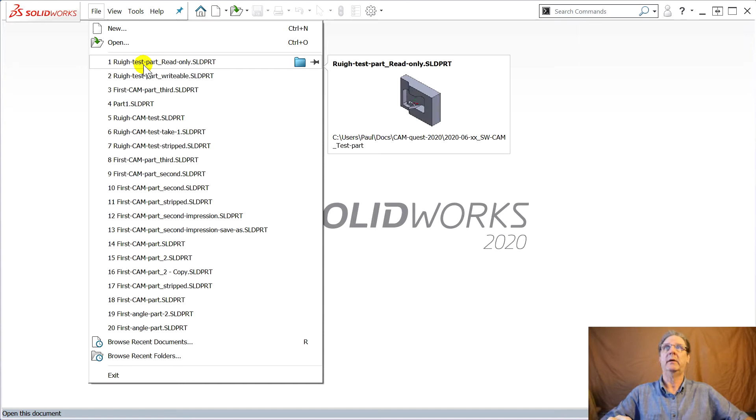So let's see if we can come up here and start. I went Ruigh test part, read only. Open it read only, just to make sure. I went and got it off of his email when he sent it to me, because, okay, it's converted - he must be using an earlier version than 2020.

So here's the part, and here's - I think it's 3 inches by 4 inches. What is it? Solid body. Isn't it amazing? There we go. It's 3 by 4 and 1 inch tall. So much more reasonable than that first impression, second, third impression part that I was using, which is a ball nut. Shouldn't probably make it.

Dave gave me some advice how to make that. And so we're going to have a fourth impression on that one and show you how Dave would make it, because he's a lot smarter than me.

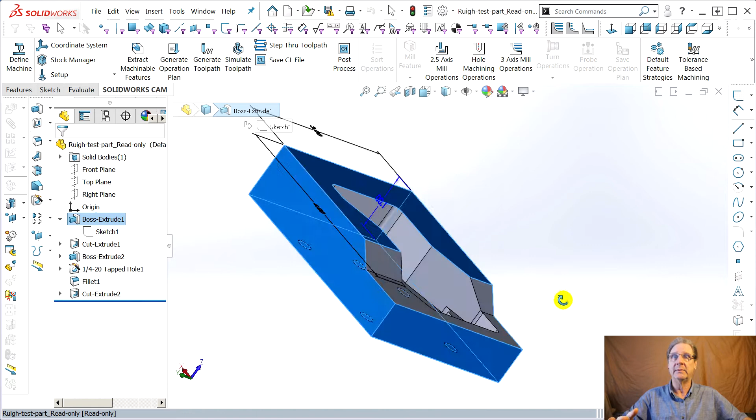So here's why Dave knew - now I understand why Dave figured this would screw things up. It's got a breakout here from this 1/4-20 tapped hole, and it's got another breakout here in these two bosses. But he did its thing - he let the SolidWorks do its thing.

What do you do? Escape. And then here's where - it's interesting because his has all this, mine doesn't.

All right, so when you go to SolidWorks, tools, add-ins, turn on the CAM, you get these three tabs. This is the feature tree, shows all the features that this thing sees, that it automatically recognizes. I turned on this command manager here.

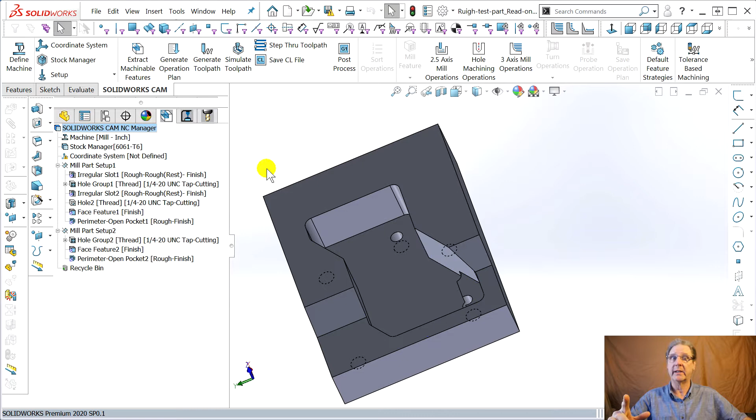It's a right click, so you can say extract machinable features, and I think that's what he did. I'll verify all this for the next one, because there's going to be a couple of videos about this part, trust me. Then generate operation plan - that takes the features, like you've decided, well, that's a pocket, and that's a tapped hole. All of these things here, face.

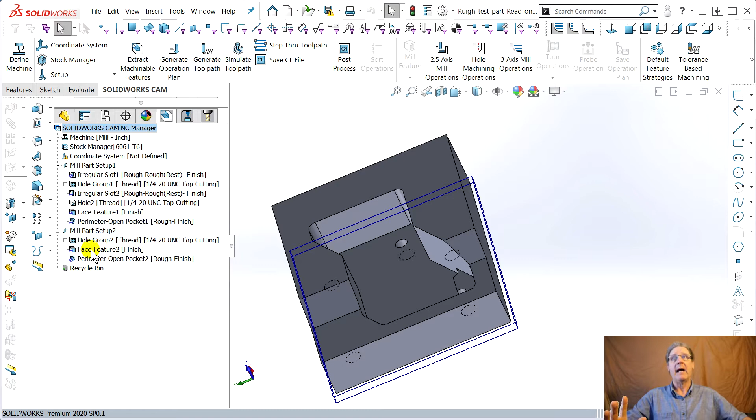See, you can see this thing's already screwing up. It's putting the face feature after the holes, so a center drill will crash - you'll rapid a center drill down into the stock because you haven't faced it off first. I don't know if Dave moved those around, or I didn't move it around.

So these features come next. Then there's a tool crib - these black tools are the ones that it uses, blue means it's not in use. And SolidWorks decided all that.

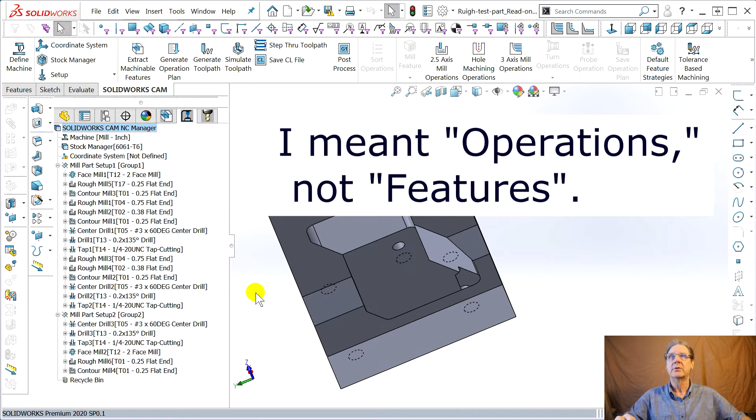So we're back in the operations here, looking at all the operations. You can see the tool paths, so let's get it so you can see it. Say simulate. Now, here's what's dangerous - if you say ignore collision and let it do its thing, it's pretty impressive.

Got to cut these corners off. It does the perimeter, does this inside part - it all looks pretty cool. It's doing rest machining, very sophisticated, where it uses a 3/4 inch end mill, but then it can't get in the corners.

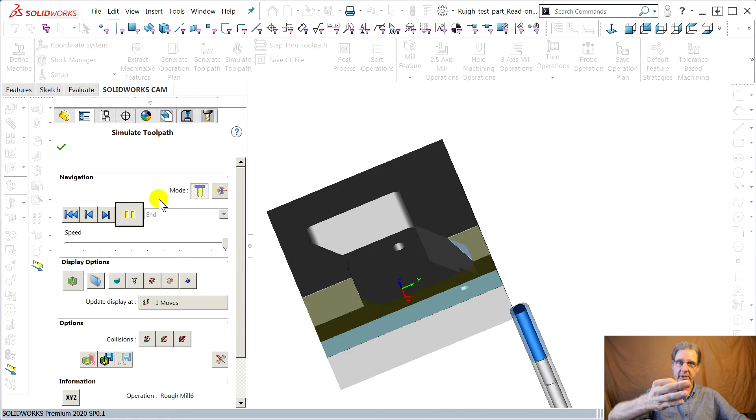Then it uses a 3/8 to get the little bits it couldn't get, but doesn't go over the whole pocket. It just does the ones that were left, rest machining. Then it does a finish pass.

Oh, so sophisticated. And you think, oh well, this is cool, look, it did it. This is what impressed Dave. But there are 2 problems.

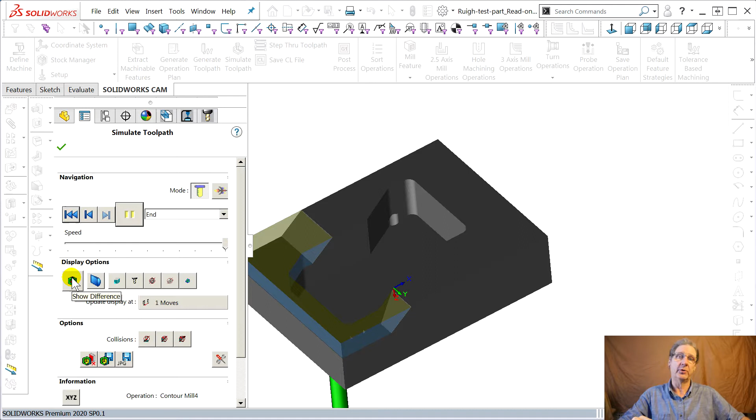First, you got to know, oh, to show the difference, this is how you see what's going on. Well now, okay, I think he and I both didn't expect it to do this angle. That's called, you can do it even though this is a 2.5 package, you can do it with, was it multiplane? I forget.

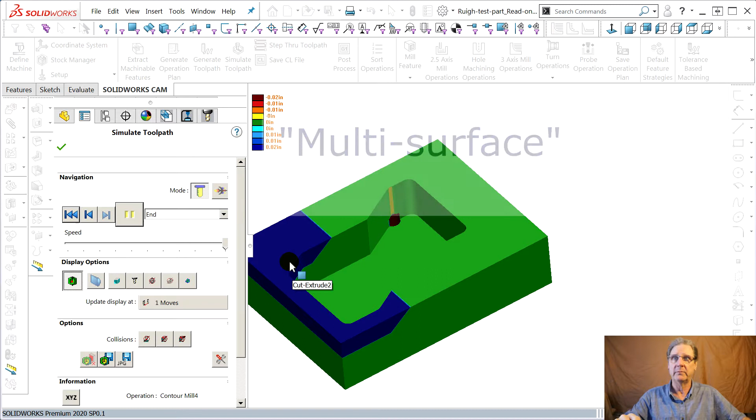So you can go and just raster across this and carve it down with a ball nose end mill. And that's another video, we'll show you that. So don't be worried that all this blue is left. This is the deal: see, when it's blue, it's uncut. When it's red, it's gouged. So this yellow one has got a little gouge here.

And if you come in real close, oh by the way, I found out you can switch the way the scroll wheel zooms to make it like TurboCAD. And that's under options, view, I think. And it lets you change the way the mouse wheel works.

Now notice, it left this little blue thing that's extra, and there's a little extra here, there's a little extra there. Then, oh, it's so heaven having the scroll wheel work the same in both. I use TurboCAD a bit, you know, for construction, stuff like that. It's a Boolean thing, it's not the best.

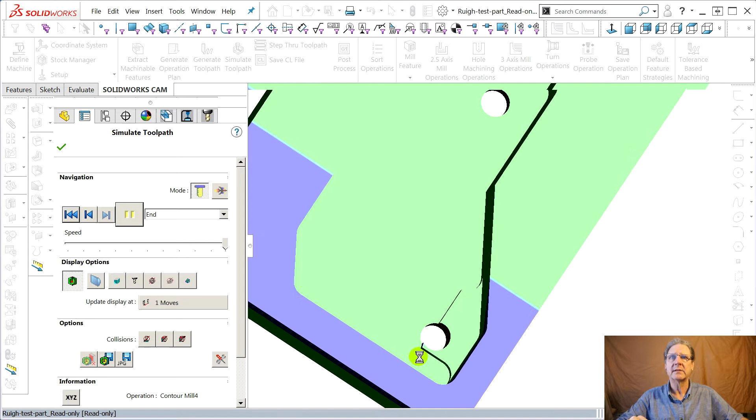And then it left a little bit here. See that little blue there? What's going on? What's that added to?

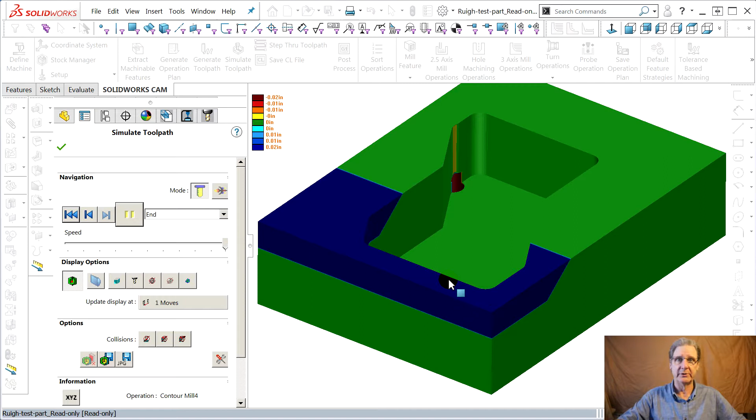So that's a concern. And you say, oh well, it's not much. It is, because the part's not to print. The machinists I know, I got a lot of buddies who are machinists, they go nuts. It's not to print. It's gouged there.

So, but the real problem, go here, you always want to pause on tool collision. Because this is what screwed me up once. It was out of order once again with the facing.

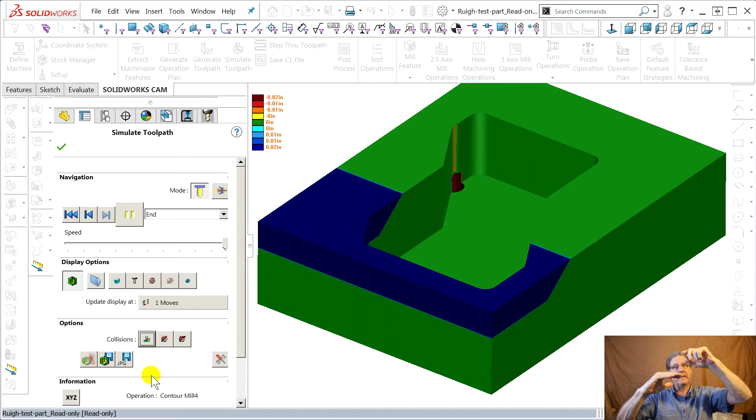So before it faced, it went to go do the center drills on some holes, except it rapids down right to the top of the part, but it's still stock now because you haven't faced it off. Well, it all ends up looking great if you ignore collisions.

But now that you turn collisions on, let's go to the beginning. It's doing its thing, it's doing its thing. Boom, first collision. And you'll see that's because this pocket is misdefined in the feature.

When it automatically recognized it, it only recognized it starting up here. It doesn't seem to realize the pocket's supposed to be cut from top to bottom. Okay, so here I'll just hit enter. Okay, all these tool crashes.

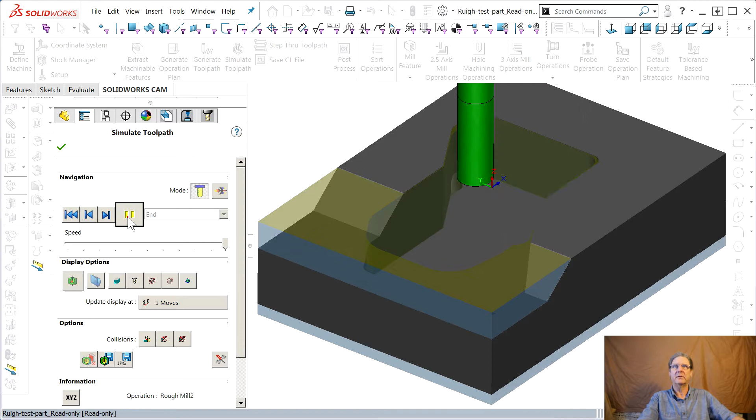Now it has some others with a drill, the rough mill, center drill. I think that's a little less problematic. I'm not sure, we'll have to go look.

Oh yeah, because once again, it's order of operation. They're doing those two holes. Why they're doing them from above, I don't know. They could do all the holes from underneath. This is when computers do your thinking instead of your work. So that's what was going on there.

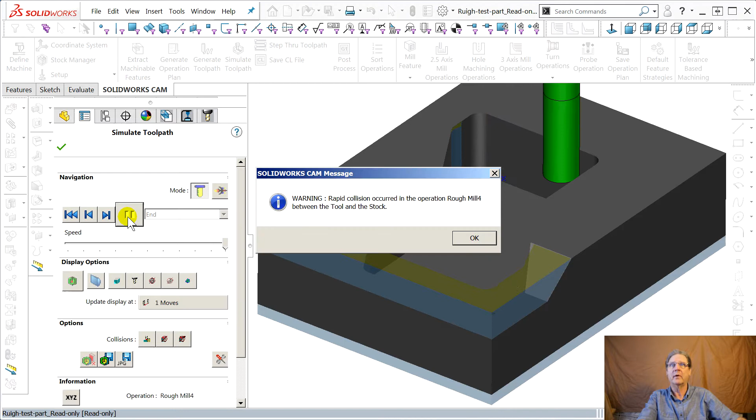All right, all right. And see, same thing, because the facing is in the wrong order. And like I say, I don't know if Dave moved them around or what. I can't imagine he did, but okay. And see, there was the face, the big face thing that you saw fly by.

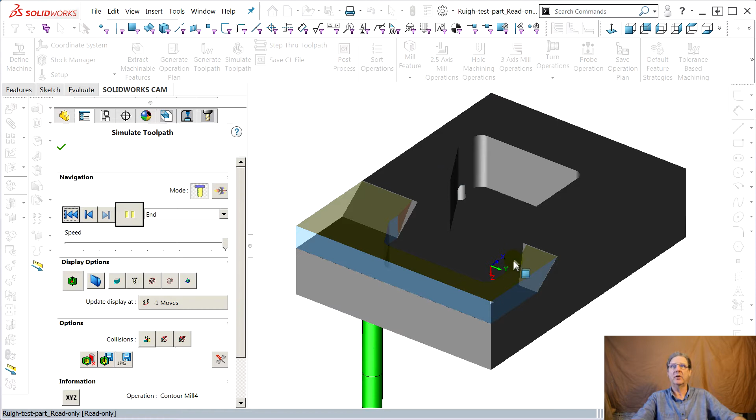So that's the first problem. Okay, so now we know we got this gouge here, we got a little extra material, something isn't right here.

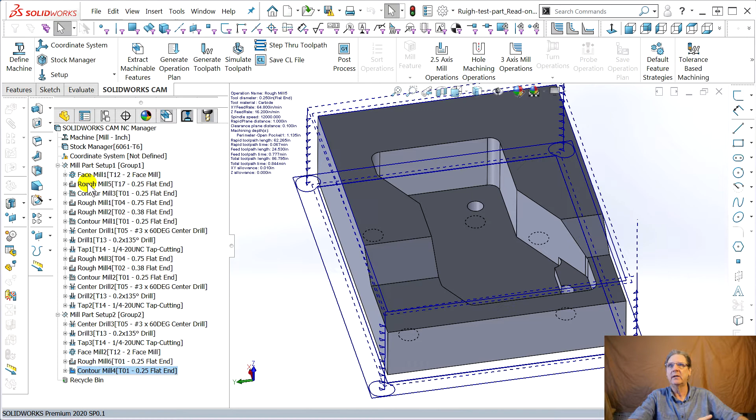So in the feature, in the middle one, okay I'm sorry, I said feature, but it's so confusing with these two tabs, the operations tab, not the tool, the middle tab. Okay, first mill part setup one. It's facing, that's good. It rough mills, contour mills.

Let's do this, let's just delete everything. Contour mill the outside, delete, because we know it's this pocket that's the real trouble. Contour.

We'll even take these drills out. Delete, yes. Drill, delete, yes. Tap, delete, yes.

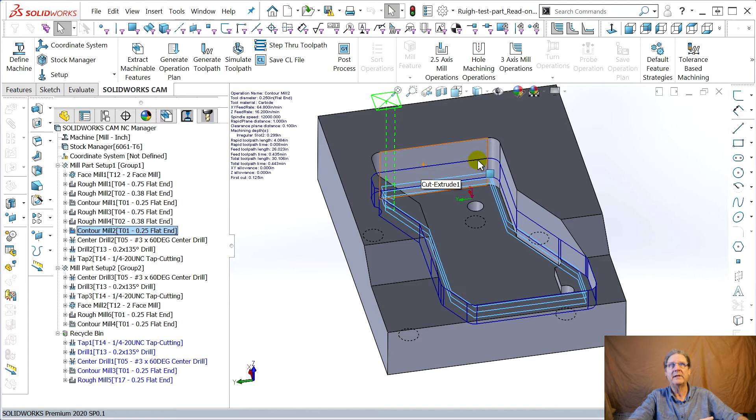My videos have been running long. See, here's the problem. It's defined this only up to here, but it's supposed to go all the way to the top of the part. So that's some of the crash, and you can see it's rapiding down as soon as it hits here.

Center drill, I'm going to delete this. I'm going to simplify this part. Drill, delete. Tap, delete, yes. And then the whole bottom thing, let's delete that, because this video is just going to be the pockets. Let's take that out.

So now rough. Okay, so here, this is the rest machining. Very sophisticated, this is wonderful, right? It takes a 3/4 inch end mill. And see, here's one fundamental.

It's doing the bottom pocket first, then the top pocket second. So then it does a 3/8 to get what was left over that the 3/4 couldn't get into. Then it does 0.25, a 1/4 inch end mill to finish. That's contour, right? Doesn't worry about it, and it doesn't spend a lot of time.

So obviously, rough, hit control, rough, contour. These got to be right under the face. Now we're going to do them in the right order. But it still won't simulate right. It's going to cause problems, you can tell, right?

This only goes up to here. You can see rapid moves going down here.

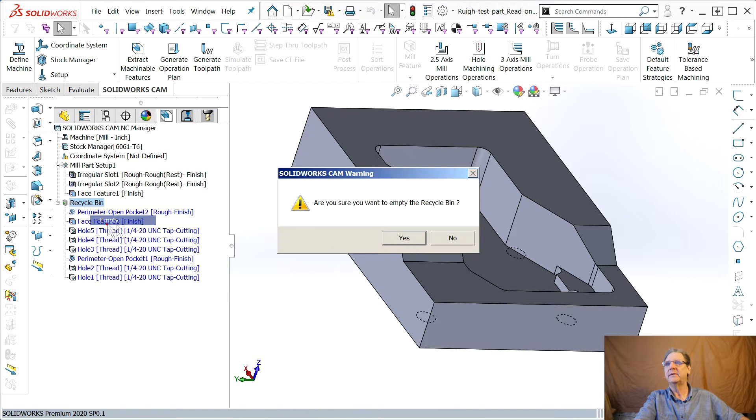Sometimes, okay, delete, yes, let's see how smart this thing is. Delete, maybe I went about it the wrong way. Perimeter, delete, we'll fix that, another one. Mill part setup 2, yes. Recycle bin, empty, yes, passive aggressive.

Generate operation plan, regenerate from the start. Okay, see, and you got to watch - even though you're here, when you say regenerate operation plan, it hops you over to the middle tab. They're helping you, right, to confuse where you're at.

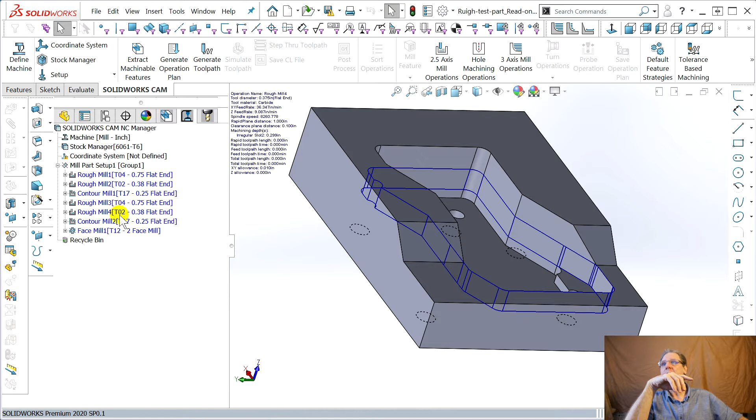See, it still did the face mill at the end. You got to wonder. So let's get back to where we were.

Face mill on top, rough. How do we call it? Rough, rest - see, they call it contour and finish. Depends what tab you're in, whether it's a finish or a contour. And there's that. So we want to take these 3, control key, to go right under the face.

Bam. Now this is telling us face, so that when you run stuff down, there's not material that crashes the tool. Do this,

Rough. Now, this is going to be a fiasco. We're already 12 minutes into this. Watch this fiasco. We know that this is wrong, right? Because the pocket goes all the way to the top.

Why did it decide to only - because of this plane? Like Dave said, he's a smart man, he knows what confuses CAM programs. So this is a feature problem, right? We haven't defined the feature.

This is just, we'll use this end mill, the operations tab. Well, what end mills, rough, rest, finish, just rough. So we got to go here. And let's fix this here. There's the other thing I hate, that these are different.

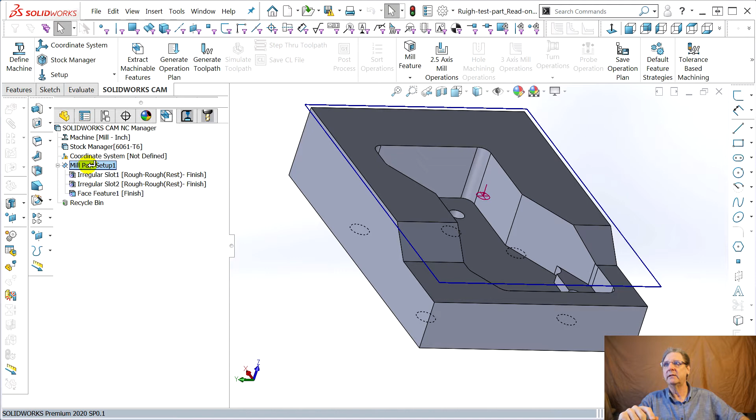Changing the order here doesn't force the order up there. Or maybe that's what did force the order, I don't know. Irregular and rough, okay.

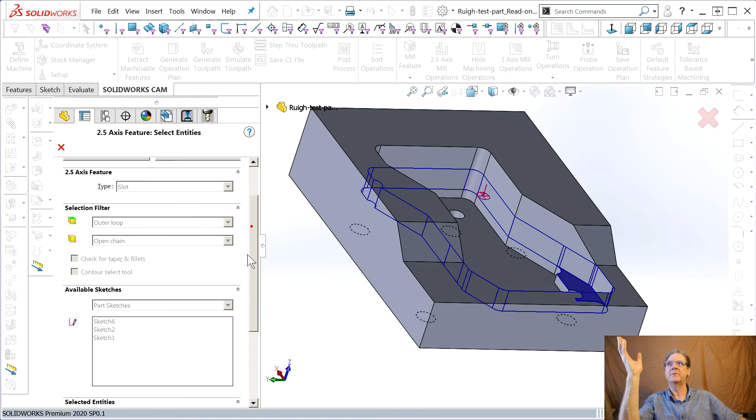So the face is fine. This is the one, double click on it. Watch the problems I'm going to have with this, because I tried and tried. Okay, so it's saying do this loop.

I want to start it higher. And some features, it says, it has 2 end conditions. They don't say start condition, end condition - 2 ends.

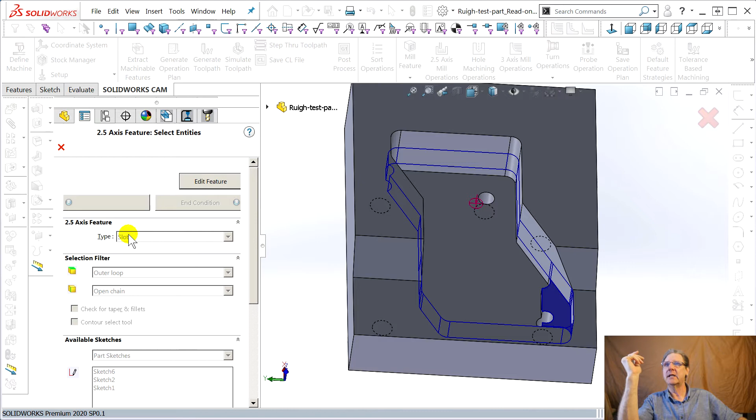Well, it's a slot, you're not allowed to change that. Edit feature. Okay, so now you're saying, okay, good, it's doing this - this is just what we want. We just want to start it. Instead of starting it here, we want it to go all the way and start at the top. Even though it's a start problem, it's called an end condition.

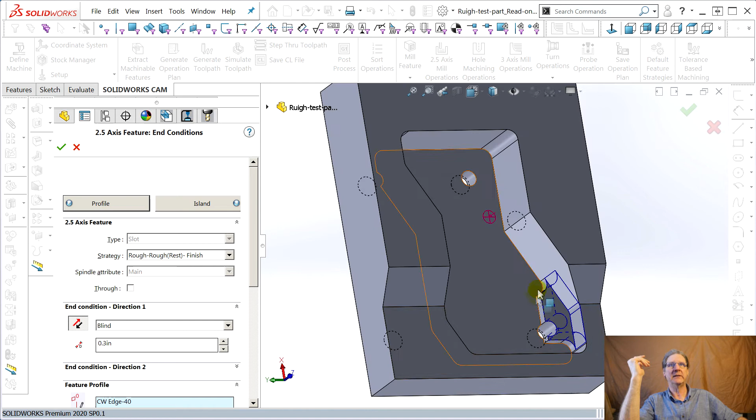All of a sudden, it changes the profile to this. I tried and tried, I couldn't get it to work. So what we have to do, after rehearsing and rehearsing, we have to erase this. Delete, yes. Irregular slot.

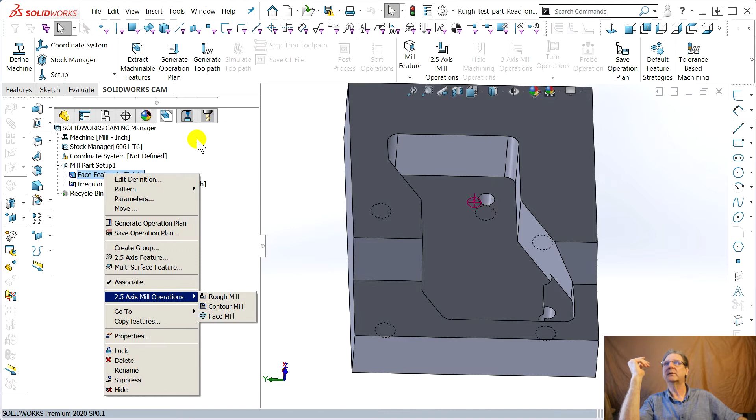Remove, yes. Then create 2.5 axis feature. We don't want a slot, because I've been through this. You should see it starts cutting out here, and it gets all confused, and it probably is operator error.

But boy, is this hard to work with. Okay, I thought, well, for the entities, do this and this. They'll add together. Now it gets all confused. Can't do that. You got to do something really tedious, because software is supposed to eliminate tedium when really it... and there was something else.

What? Outer loop, open chain, I think you select. How you're supposed to remember all this. See, I'm an intermittent user. I do this for prototyping.

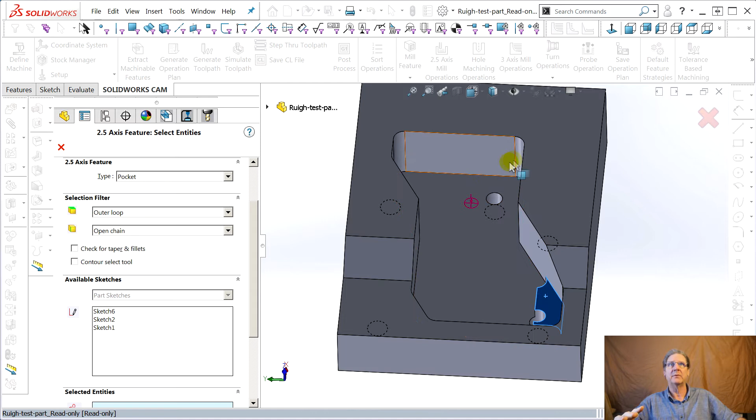So now, same thing. You can't do the faces. That causes problems, for me at least. You got to do it very tediously. Select these. Select these.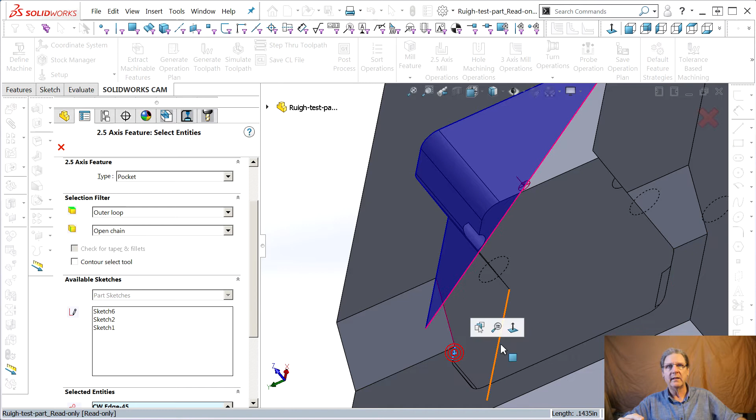Select. It's nice that they help you with this little vector. This is very impressive. You do this, it's smart enough to do that. If you miss one, this blue goes away, because it's like, hey, it's not a closed contour.

And I assume we're all familiar with the grief of trying to find and fix open, broken contours. Come on, Paul.

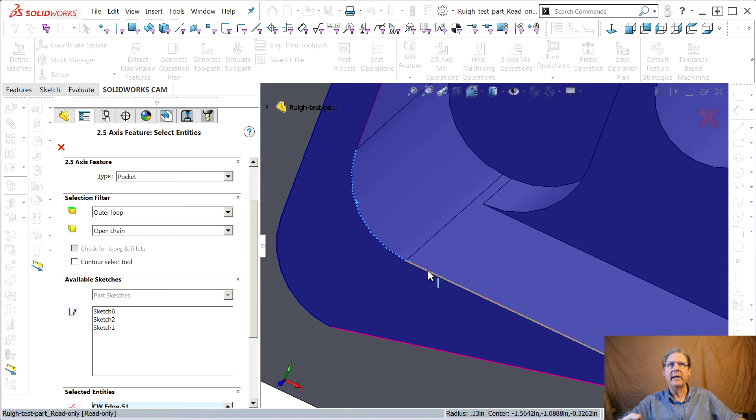All right, we want to do this one. We're doing so. Oh, wait, now here's a real trick. See, because this one... no, we're okay. Just do this. It's another one we're going to have fun with. This one, you got to make sure you get this one, and this one.

See, it's still working. I know this is pretty hard to follow. I'm sorry. Then this one, then this. I think it followed it.

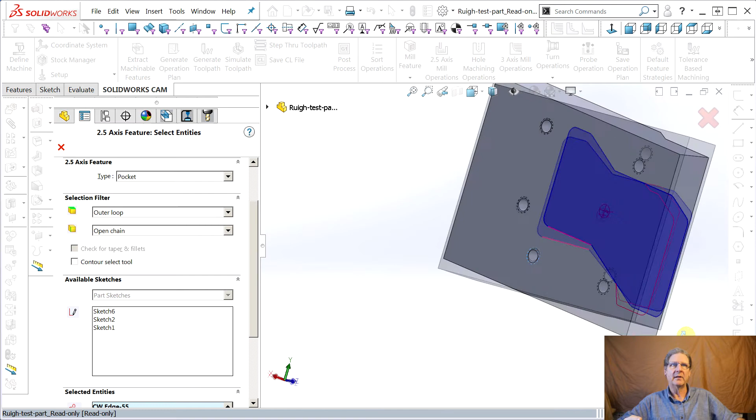And here. No, it's confused. Here and here. I think that's saying, I think I've defined the edges of the pocket. And you go up here because nothing's in a convenient spot.

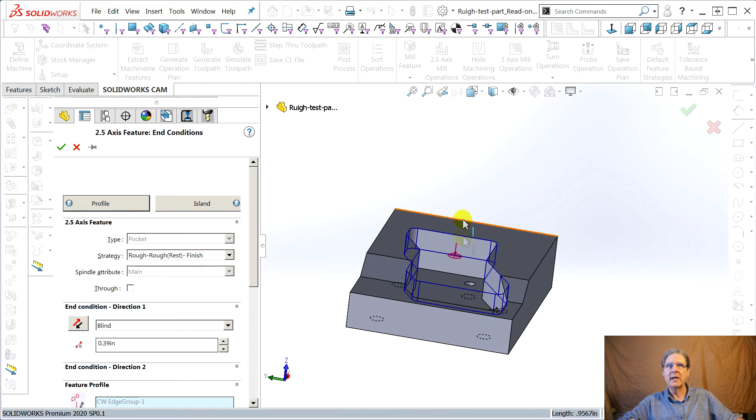Now it's coming down. It acts, it starts at this pocket, even though end condition 1, end condition—look at this. End condition, direction 1, end condition, direction 2. This is set to 0 because it's based on where that profile was.

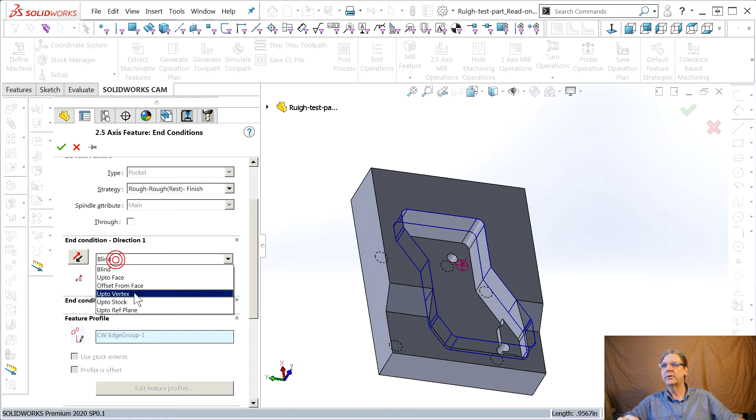Except it was smart enough, because maybe I picked this first instead of picking down here. It's smart enough to put the profile with 2 end conditions instead of a start and an end. So then you say up to face, and you want to go down to this face.

Bang. Perfect, huh? Sweet. Say check. Now you define that feature.

It's the first thing you're going to do. You face it, then you do this. So now let's say, I learned never go up here because it'll do goofy stuff.

Generate operation plan. It did. Now it jumped, it turned all blue. Panic you—that's because it jumped tabs. We were over here. And when you did generate operation, you did right click generate operation plan. It helps you by jumping over there.

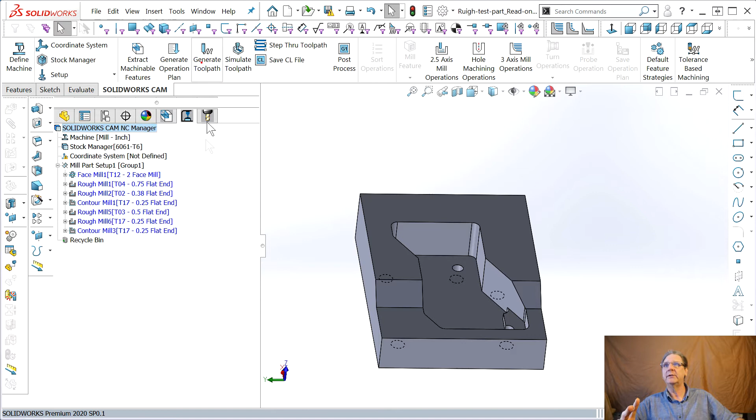These are all blue because it doesn't have toolpaths. You generate the toolpaths. Bang. Now, face mill. Oh, it always does them in the wrong order.

Don't know why. Always fighting. It's automatic. Automatically wrong. Okay, rough. This is the other problem I have, is hovering versus clicking. Okay, then it does rough with a 1/2 inch.

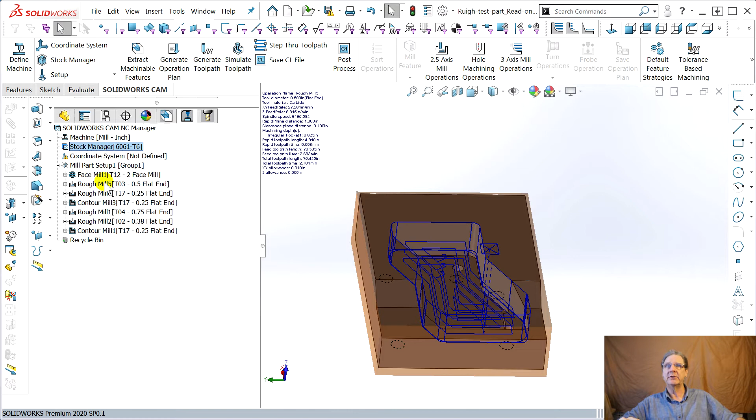Oh, the 3/4 inch end mill, it decided not to use. It's just doing a 1/2. It's doing a rough, then the rest with a 1/4, and then the contour with a 1/4. This one, it stayed with the 3/4, the 3/8, and the 0.25.

Why it decided that? That's all in the technology database and strategies and all this. Oh, and that kind of feature gets handled this kind of way. Sorry, we generated our toolpath, simulate toolpath.

How are we doing? 19 minutes. Did I leave this on? Yes. Okay.

Oops, we still got a crash situation here. What is it? Rough mill. Oh, I know what's doing this.

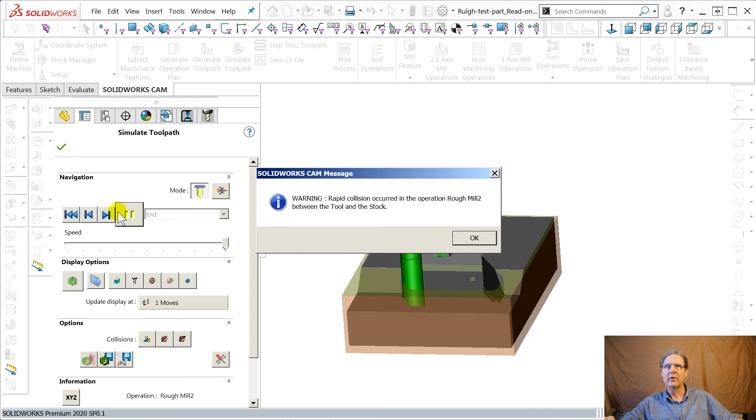Okay, this is entertaining. You'll enjoy this. And now we're done. See, because we took all that other stuff out. Now watch this. Oh, that's cute, isn't it? It gouged here, and it gouged here.

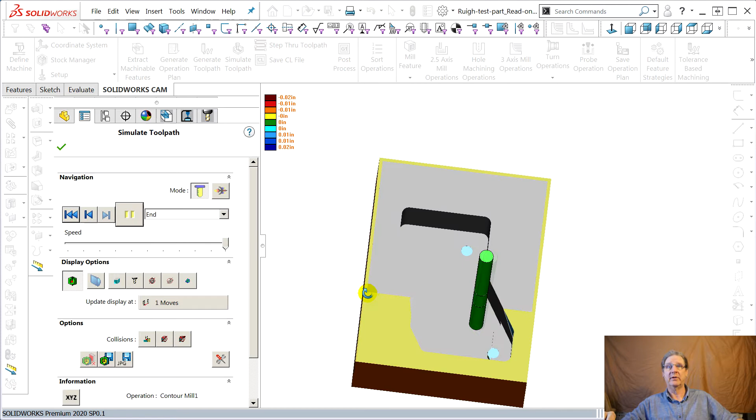I think maybe this is why they forced the goofy order of trying to do the lower pocket before it does the upper. It's got this big thing missing. There's a deterministic way why it did this, but it's pretty entertaining.

Okay, here, and you go to that. We're in operations. We're in rough.

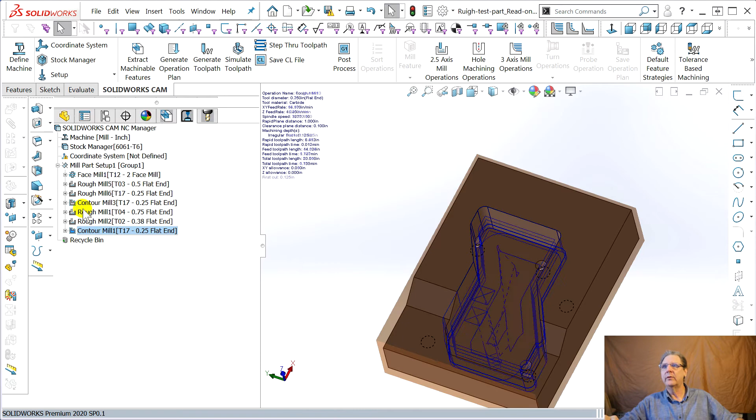See, these greens, I believe, are rapids. So it's rapiding down, will be okay. I think it's the second one.

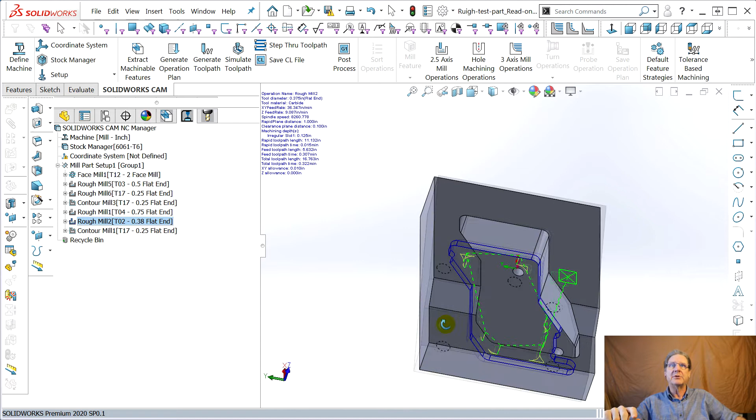See, this is the rest mill, where it's taking the little leftover pieces that the bigger mill couldn't get. So it's rest machining, but then it decides just to bomb right through. When it rapids over to do this little bit of leftover, then it rapids over here to do this little bit. That's where it's nicking and gouging off these things. Not very smart, but good enough that they show us.

Once again, middle tab, rough mill. I think you just double-click here. Then I have to open these off screen, because if I close it on the screen, it goes to a non-existent monitor and I got to go hunt it. You're going to have to put up with this.

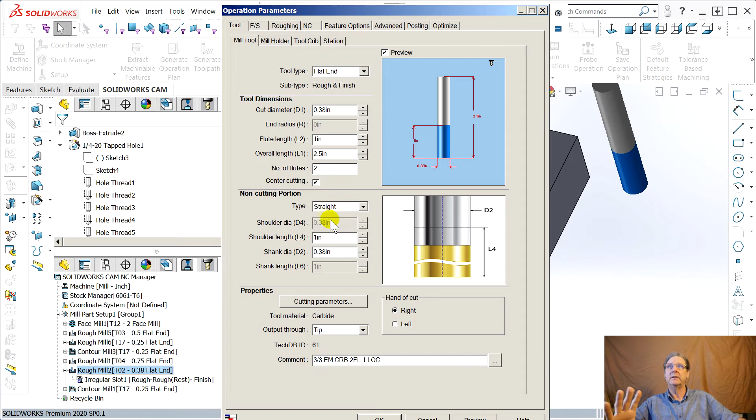Then tool, this is a tool it's using, fine. FS means feed and speed, didn't want to write it out. Roughing, this is, leave a 10 thousandths of an inch allowance. The finish mill is going to clean that up. Lots of choices, I assume needed. NC, numeric control, that's what it means.

It should be toolpath. What's going on is we don't go up high enough as we jump around to do those leftover corners. So clearance plane is top of feature. We want top of stock.

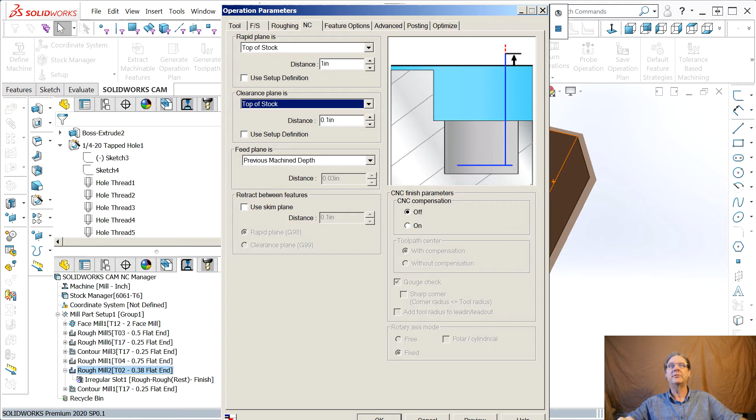Boy, did it take a long time to figure this out. Oh, don't say okay here, I'll be in deep doo-doo. Pull it off screen and say okay. Did you see him jump up? Now those gouges will go away.

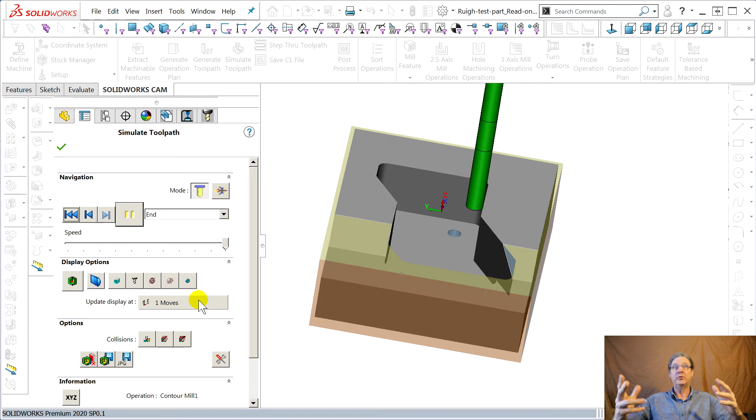Is it too tedious showing you over and over? That's why I took about all the perimeter and all that stuff out, so it's a little quicker, because this is what I've been doing all day, two days in effect. Notice there were no crashes.

But we still have stock here, and stock, this stock. And now that we took those holes out, you can understand what was going on, why we had that little swoop right here. When the hole was being machined from underneath, or actually they come from above, I guess, because there's a center drill that would hit here, a lot of it gets cut off by the drill. And so all that was left over was this little corner here.

But something was wrong, right? It's really important to find that out, okay? Get out of the simulation.

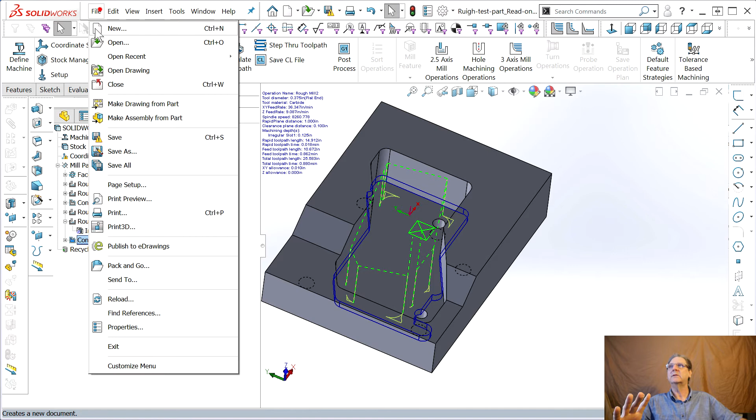Let's save it because we're in the save, read only. Writable. Is that writable? Saving the following files to the current version. He must have an older version. But I just wanted, because I got to convince him, like, Dave, this is the way it acts on my machine with my version.

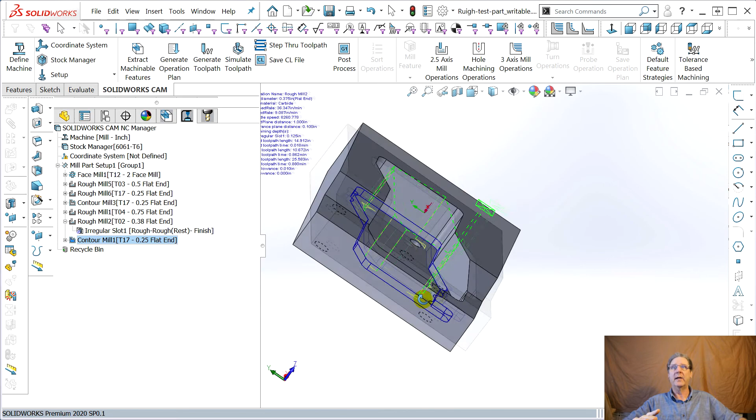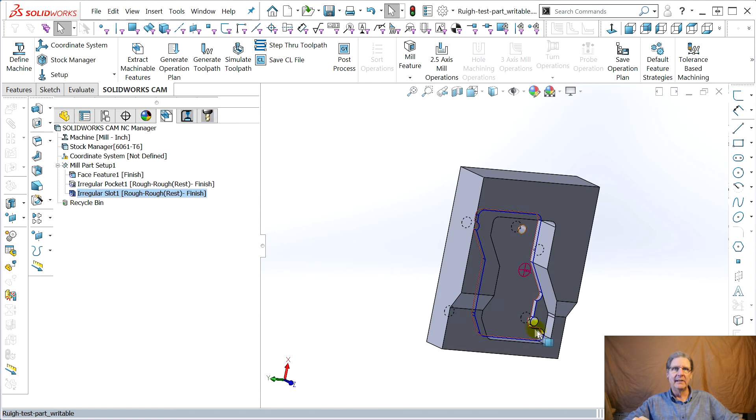Now we got to fix, once again, you go back to the features, irregular slot. This is our problem, right in this area, and you can see these dashed lines. Is it so confused? It kind of knows that it's confused. Same thing here, dashed lines.

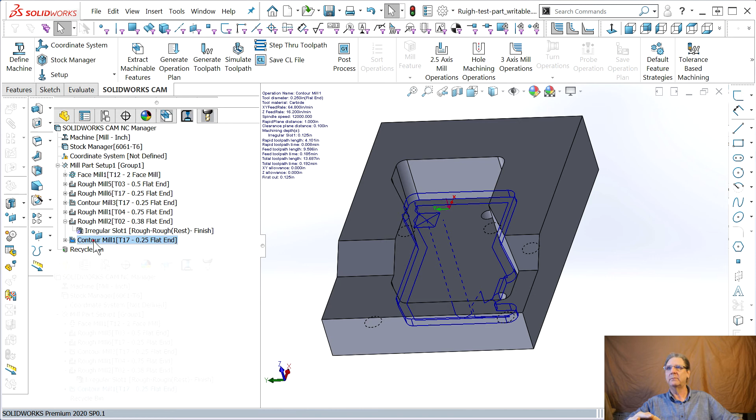There is a place on the, let me go back, pick the rough, I guess. Or maybe let's try the contour. When it's doing the final finishing, contour mill. Double click on it.

Boy, am I confused now. Oh no, it opened up here. See, I constantly confuse myself between these two tabs. Double click on it here. Edit feature, end condition. There was edit feature profile. Profile is offset.

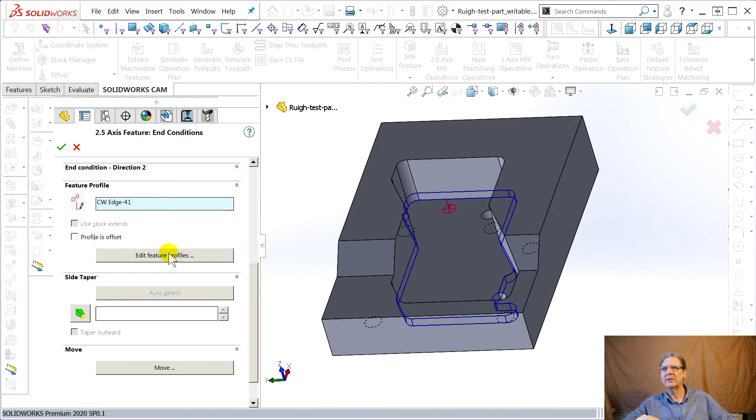Maybe real time, you'll see me doing this. Profile segments. What is this? Air segment. See, I was looking and looking for this. There may be a way here to mess with it.

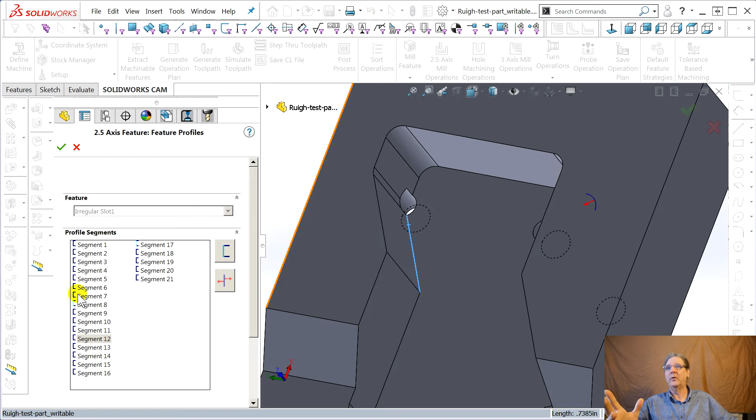I'm giving up. At some point in time, go to features, irregular slot. You can delete it. Yes. Remove. Yes. And then what I had to do is go here, now we're doing something in the part in order to get it to machine over these open holes.

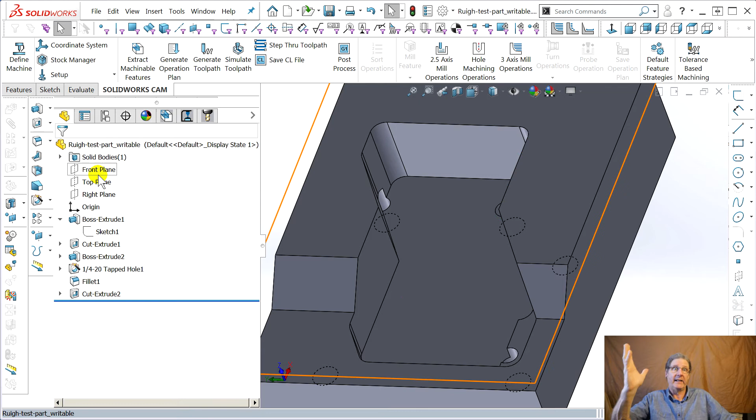And the way I dreamed up to do it, I'm not saying this is the right way, I'm the newbie. All right, select that face and make a sketch there. While the face is selected, convert that face and the lines onto the sketch. Bang, there they are. While this is still happening, go select this.

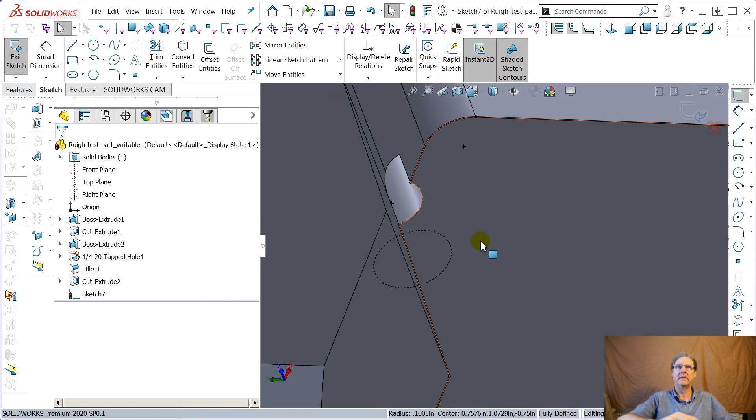Where it's wrong, delete it. Come over here where it's wrong, and delete it. This one's pretty easy to fix. Grab this, drag it out. When it snaps there, done. This one was a little trickier.

To be safe, because we all know about laying stuff on top of one another, I erased that one. I erased that one. Then select this, say convert. Select this little one, say convert. Select this big long one and say convert.

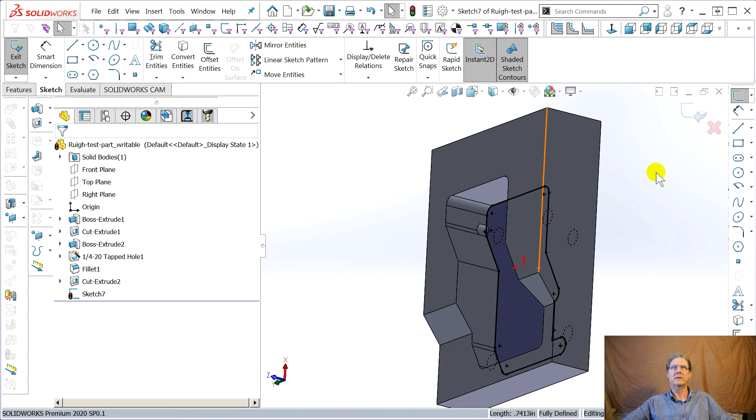Excellent. Then exit the sketch. Call this CAM kludge sketch. It took a long time to figure out how to fix this. All right, so we've done that.

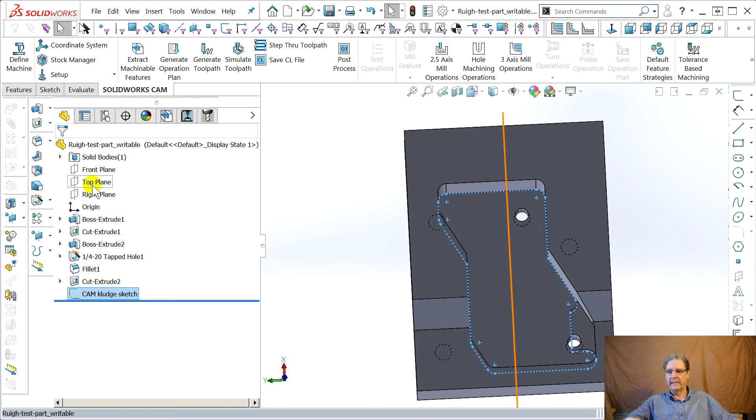Escape so that nothing's highlighted. Now you can go into features. 26 minutes, will we make it? I don't want to go over a half hour. Irregular pocket. Okay, so then we say 2.5 Axis Feature. I don't like slots, I'm a pocket guy.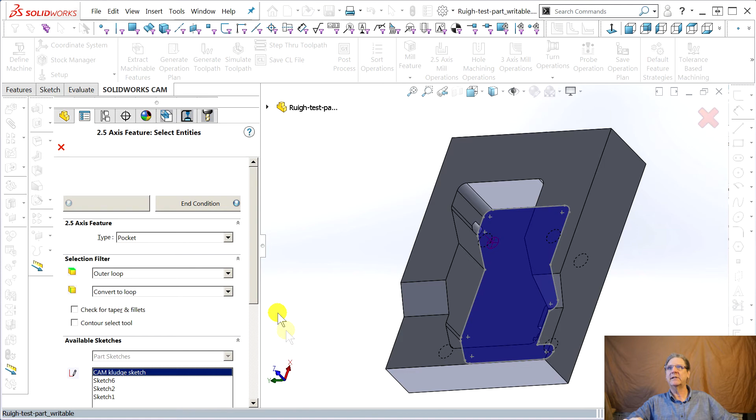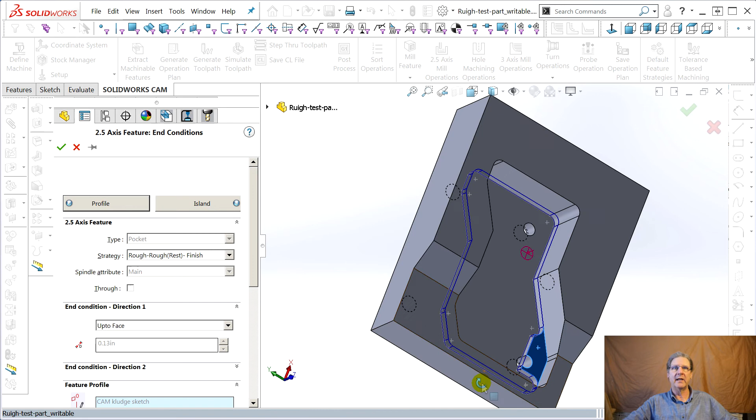Available sketch, CAM kludge sketch. End condition. Look at that, it's going blind, obviously. Up to face, and it's on the floor, so we've got to go up to this face. There we are. See, but the important thing is we've got a straight line going across there, and we've got a straight line so we won't leave anything over.

And I think we can just say done. Generate operation plan, it thinks. It's jumped us over a tab. Say generate toolpaths. Nothing's complaining.

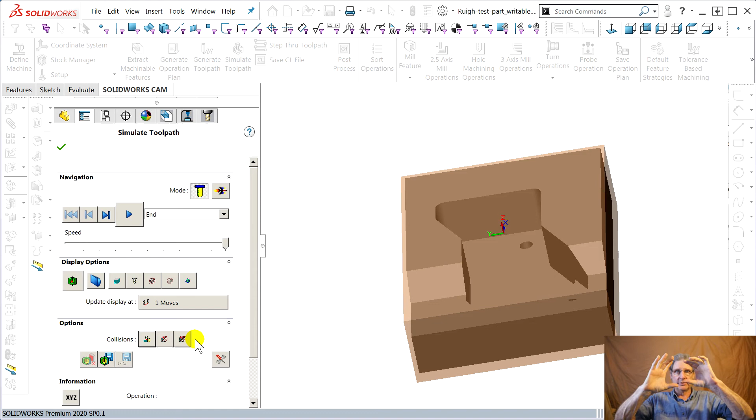Let's go see simulate toolpath. Make sure you've got pause on collision. And before you go to the mill, you should have all of these turned on, because you're going to want to make sure that when it's cutting the flutes, you can't cut with the smooth shank against the part. That's a no-no. A chip will get in there and ruin everything, break the tool, who knows.

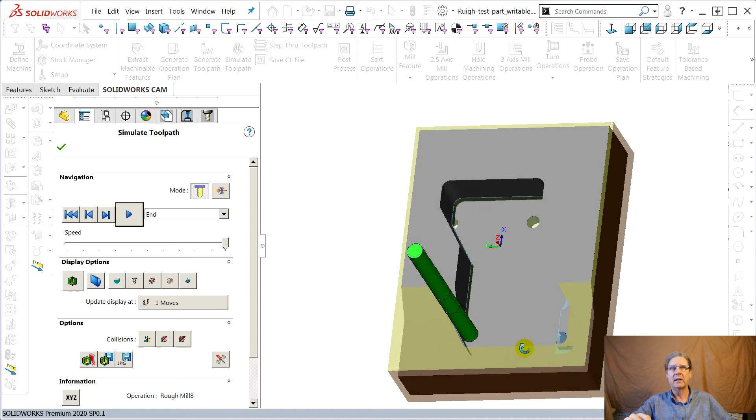So we'll go real fast. And then I have another problem, as I discussed in the third impression video. Oops. Rapid collision occurring, rough mill between the tool and the stock. Oh, that bothers me, I'm telling you.

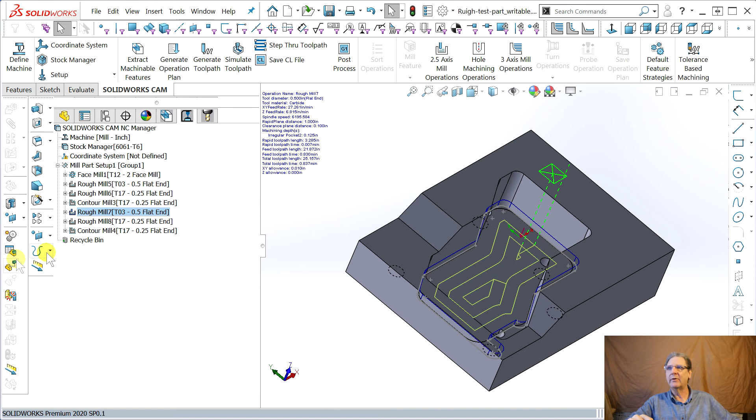Oh, maybe it did the same problem. Okay, this is the same problem. We can fix this. See this? It just seems you're constantly doing stuff over. Okay, so this rapids down and rapids there. It'll be this one. See where it goes. So we know how to fix this.

We've been there before. Open this off screen. Go to NC, instead of top of feature, top of stock. Drag it off screen because of my goofy Windows. It's Windows 7. Don't blame SolidWorks. Windows 7, they don't even approve of it.

Okay, jumped up. I always go generate toolpath again. By the way, while we're here, parameters. Now it's cutting in 5. Oh, because we cut all the perimeter out. Okay, doesn't really mean anything.

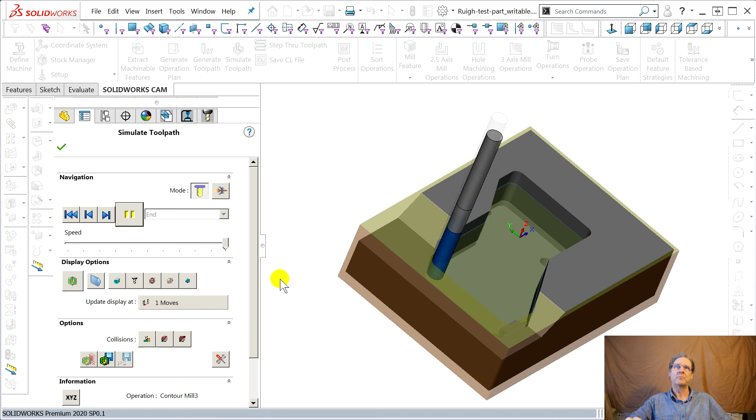And simulate toolpath. It's a race. 29 minutes, can we do it? I think it's done. And here's the real Megillah.

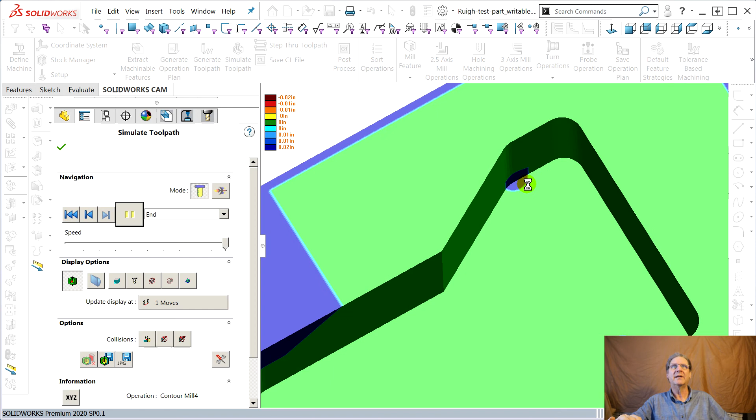So those were the kind of, this automatic stuff, I'm sorry, it tends to put, for me, might be because I don't know how to use the program, it tends to put stuff in the wrong order. It tends to make assumptions that a machinist wouldn't make.

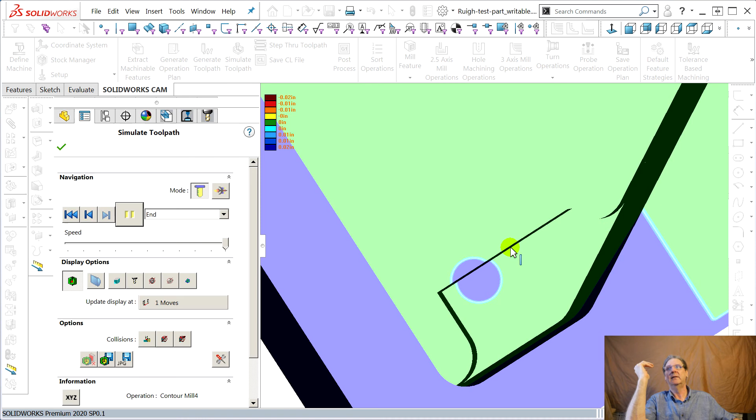So this is the first episode of the test part. So we'll do another one and show also that same problem I have. I can't use a 3/4 inch end mill. I can't even use a 1/2 inch. My spindle, the slowest it goes and is rated for that it won't burn up is 8,000 RPM.

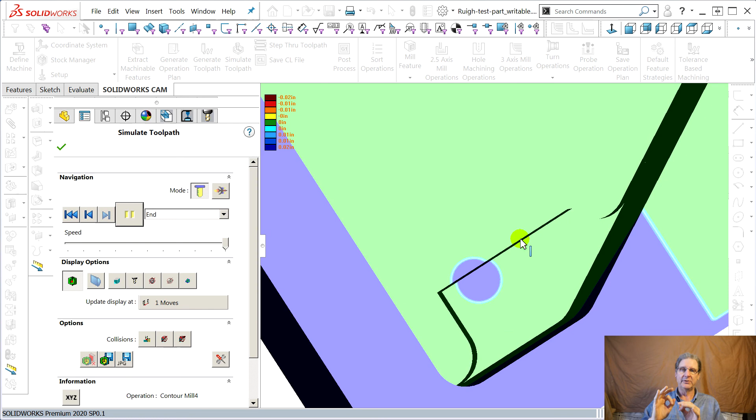You'd usually be exceeding the surface feet per minute of the tool at that speed. You want to operate at 24,000 because that's the most power. That's where you're getting the full 2.2 kilowatts out of the thing, and you can take the chips off the fastest. Now, in my Avid gantry aluminum machine, it might not be stiff enough to do that.

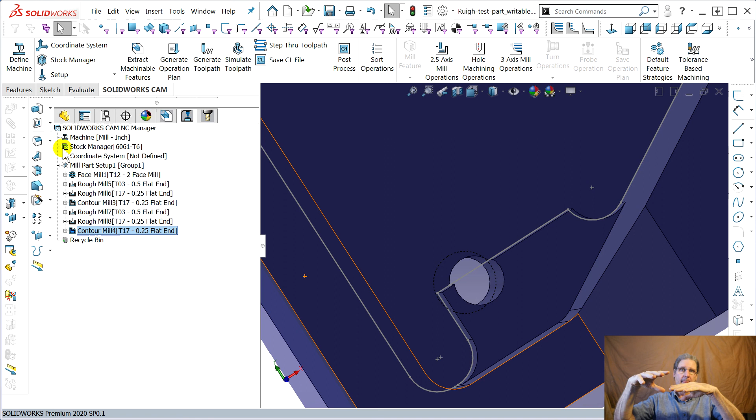But you should start trying to get chips off the fastest and then work your way down. Can the tool take it? No, slow it down. Okay, now will the machine take it? And then slow it down further. And that's both rotation and feed rates. And this program helps you a little, helps you a lot actually. When you change RPM, it'll automatically tell you, well, here's how many surface feet per minute you have on that tool because it knows the tool diameter.

So that's it. Fun today. Hope you guys learned something. Good luck with your CAM ventures. Next time we'll go back and touch up this part a little more, but that's what I have to do.